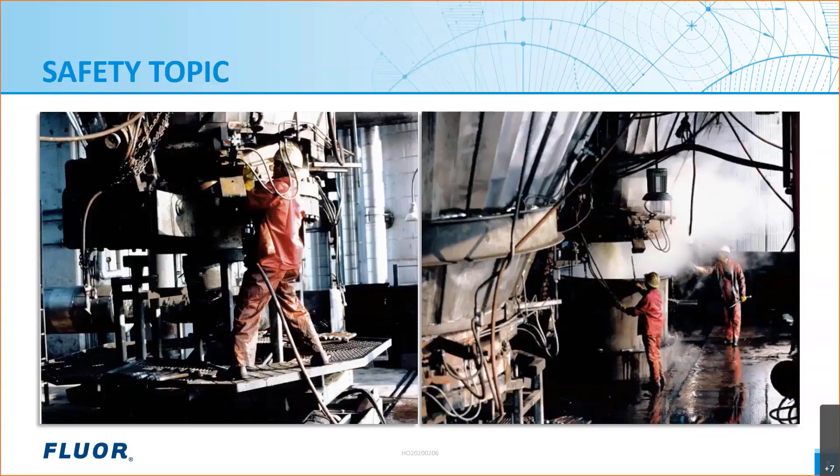The point of sharing this evolution and design is that safety and design can come from many sources: designers, operations, management, maintenance. It can be from the refiners, contractors, vendors, licensors. It just takes someone to say, what if? What if we do something to make this better and make it safer? Enhanced safety can originate from anyone willing to look at things differently and take initiative.

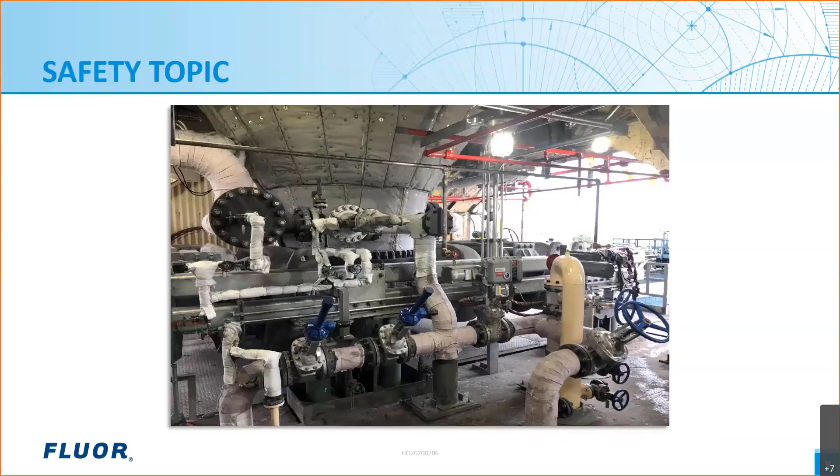Now I recognize that not all the participants in this webinar have a working knowledge of delayed coking. So I thought I would spend just a little bit of time, a few minutes, to introduce delayed coking with the hope that it will help as we present other ideas later in the presentation.

So delayed coking is a severe thermal cracking process which breaks very long chain hydrocarbon molecules, such as tar, into smaller molecules, such as off-gas propane, butane, naphtha, diesel, and gas oil. This is done by adding large amounts of energy via the coker furnace with effluent temperatures over 900 degrees Fahrenheit.

It converts essentially unusable, low-demand material into higher-demand, useful intermediates and products. The byproduct of this process is the production of petroleum coke, which is essentially 85% carbon with other impurities. Other byproducts of the reactions are the formation of ammonia and H2S.

So the cracked usable products leave the coke drum as vapor and are sent to the fractionator for further refinement. The coke remains in the coke drum and eventually has to be removed once the coke drum is filled with coke.

Note that the coke drums are located in a structure generally 50 to 100 feet above grade, and the coke drum size is dependent upon throughput, but sizes of 17-foot to 32-foot are common, and the overall height of a coke drum is about 120 feet.

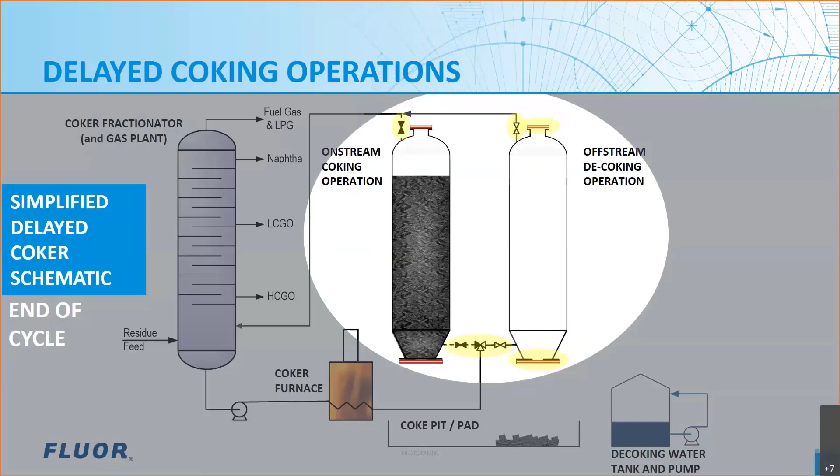So in the last 30 years, Fluor has performed 80 projects, both design and construction projects. They've been both grassroots and revamp projects.

We've done 9 grassroots DCUs over the last 30 years. We've done 44 drum replacements as revamp projects. Of note, Fluor has 14 coke drum deheading system and delayed coking patents, and we've been an innovative leader in the industry for quite a while.

With both the DCU patents and the innovation, I'd like to recognize just a few of the excellent mechanical engineers instrumental in forward thinking and innovation that I've worked with in the last 30 years. We have very good mechanical engineers.

Les Dalfi and Mike Knowles were both instrumental with respect to Fluor patents and innovation. Kenneth Kirkpatrick is an expert in finite element analysis, and I'll explain that in just a second. And in my office, I've worked directly with Mark Thies and Pat Lawley, my local office experts with regards to coke drums and unheading devices.

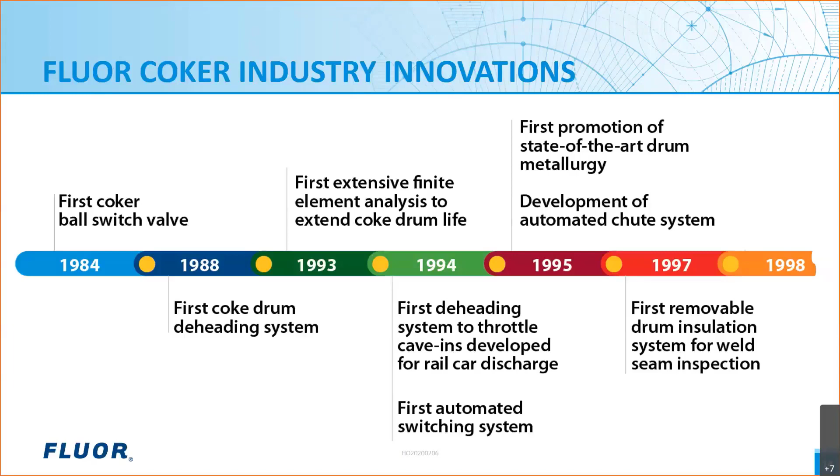As of 20 years ago, we put in the first totally automated top head deheading system. In 2001, we participated with DeltaValve in installing their first slide valve, and we've been doing that for 20 years with them now. More recently, we've developed a trolley support system for the Delta valves.

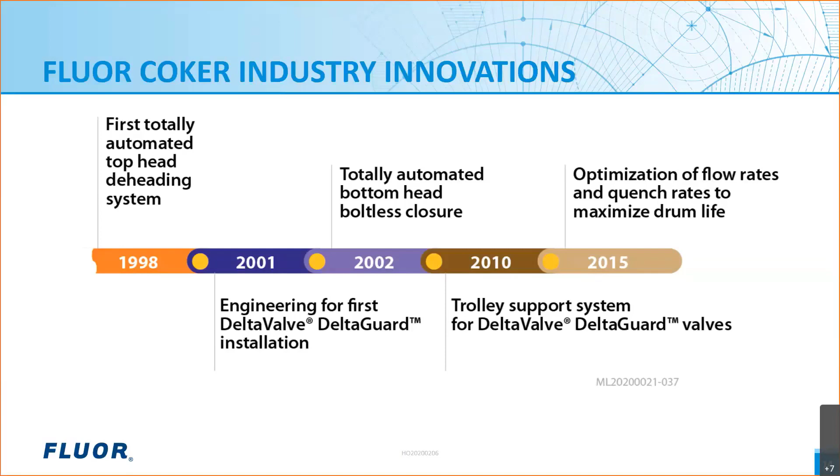We've looked at optimization of flow rates and quench rates to maximize drum life. All of that has to do with finite element analysis, which I'd like to explain now.

So what is finite element analysis? It's an intelligent, computerized method for forecasting how an engineering component will react to real-world forces like vibration and heat. It predicts whether a component will fail, collapse, wear out, or work the way it was designed.

Because coke drums are subjected to repeated thermal cycling at approximately 18 to 24-hour intervals, these vessels almost invariably develop bulges. With the proper inputs, FEA analysis can estimate how much deformation is acceptable before the vessel should be taken out of service or repaired.

Many of the old failures on old coke drums, such as buckled plates and cracked weld seams, have not appeared on newer coke drums due to this analysis, by matching plate yields, grinding inside and outside of weld seams, and having a constant thickness of drum plate material.

Fluor has done many of these analyses on coke drums, and Kenneth is our expert in running these analyses, having authored many papers on this specific topic. So, a very interesting series of events that have happened over 30 years in delayed coking.

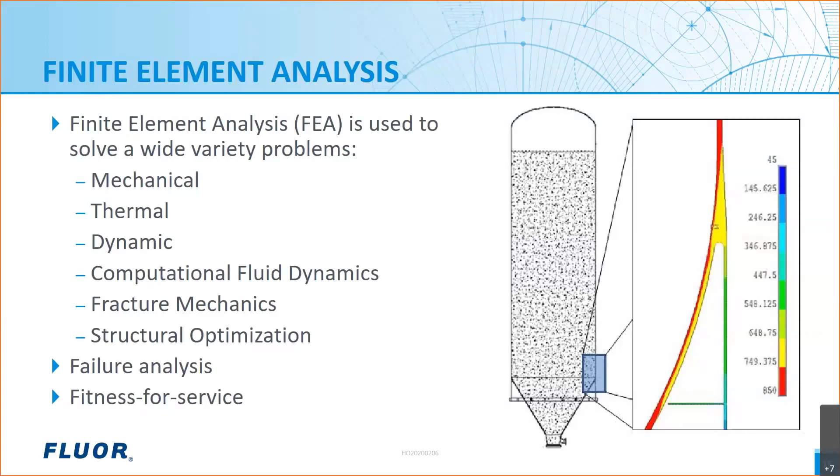In the next few slides, I want to talk about some of the challenges, some project highlights, and then give you a brief overview of some of the equipment and deheading devices we install on the revamp project. Some of the challenges faced in a coker replacement project include evaluation of the existing structure.

All of these revamp projects are done in an existing structure. Those structures are older, so they pose a lot of challenges, whether that's an alteration or repair, and also the addition of new equipment or steel, so we have to verify loads on the existing structure. And of course, we're trying to provide a very good design that meets our client's requirements and a low-cost option as well.

Some other challenges are local building codes and local municipalities, whether that's on the west coast or a location that has a high seismic zone. We have to work hand in hand with the building department to meet all local regulations and codes, and sometimes those pose challenges in determining exactly what additions will be needed to handle the new loads.

We also have short turnaround time constraints. These projects are done in existing units that are in operation, so we have to work around that time frame and toward a turnaround or outage when the client shuts down the unit so we can finish the project. There are limitations in the amount of piping, line sizes, where we can run things, pressure limits, and so on. Then there's logistics - I'll run through some pictures showing us transporting drums to a job site.

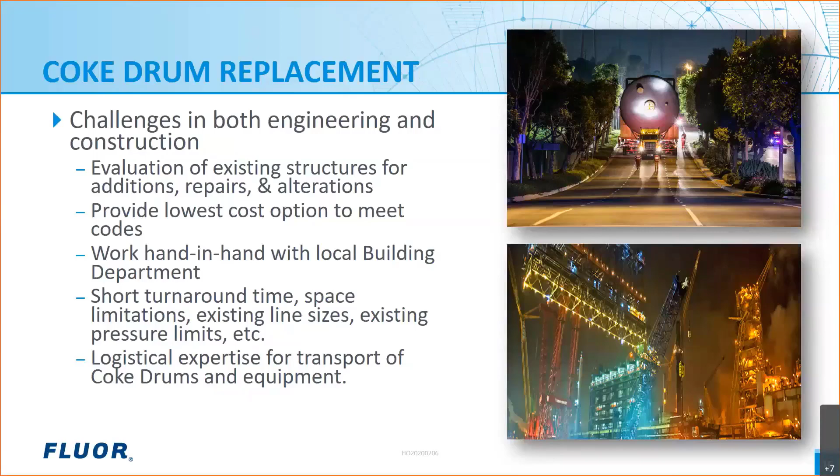So I'd like to talk about a coke drum reliability project and some of the highlights. In the next few slides, you'll see some pictures that I'll narrate too. Some of the highlights of this project: it's a 6-drum coker.

You can see the picture there on the left. It incorporated seismic upgrades to the structure. And then we had to develop quite an extensive lifting plan, because the top drilling section, or drilling derrick, of that structure was completely removed in one piece, set on the ground, and then the old drums were removed and new drums placed, and the derrick structure put back on top of it, all during a turnaround. This project was in 2014.

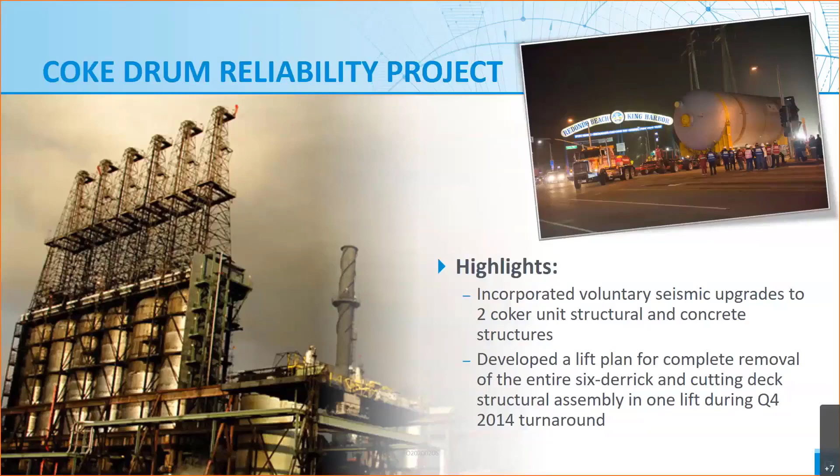As you can see, that is the existing structure. That structure was built in the 1960s, and as I stated, there were significant upgrades to the structural portions of the unit itself.

The next pictures are the coke drums. Those are 2 of the 6 drums being transported. The drums were originally produced in Spain and then transported to the West Coast, and then they were transported via barge to a smaller harbor that allowed us to take them off the barge via SPMTs and travel to the actual job site.

Some of the challenges I briefly touched on: moving the equipment to the job site. You've got to think of this as its own project, with all of its own nuances. Usually we are traveling on public roadways, so there is a lot of logistical expertise involved, working with local law enforcement and local municipalities to find the simplest but safest route to the project. You can see the drums there on the semi-truck being moved to the project site.

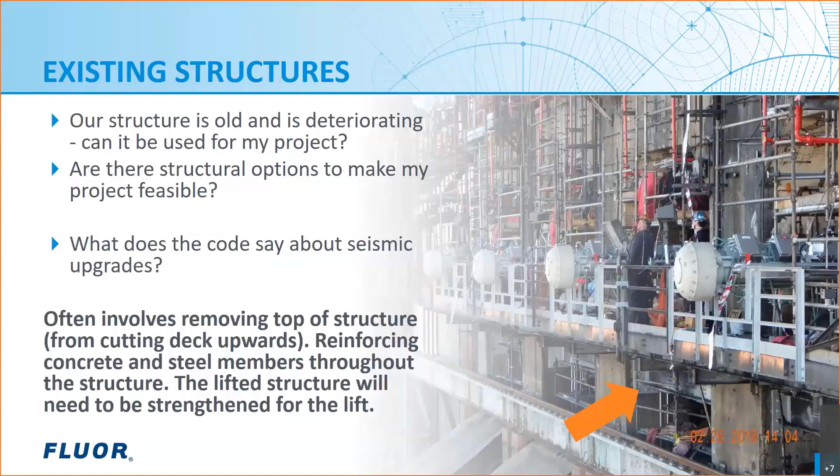And then, like I stated, lifting the structure - anything that gets lifted will need to be strengthened to support itself during the lift. Lifting itself: I like to break everything down in construction into smaller pieces and smaller projects. These are all large items, usually critical lifts due to their weight or due to the fact that you could be lifting over another structure or object. All of the structures pose a lifting challenge.

As you saw in the previous pictures, the coke drums or coker structures are vertical units. They do not have a landing deck or something where it's simple to sit equipment on. You can see in the picture there that's a delta valve on the hook of a 500-ton crane.

The delta valve itself weighs 78,000 pounds, and you can see that it's off-centered. The center of gravity on the delta valve, or any of the devices we install, usually isn't in the center of the item. So setting up the rigging and the lift plan is very crucial, not only to do it safely, but to make it completely successful and to understand how we're transferring the load from the crane to the structure itself.

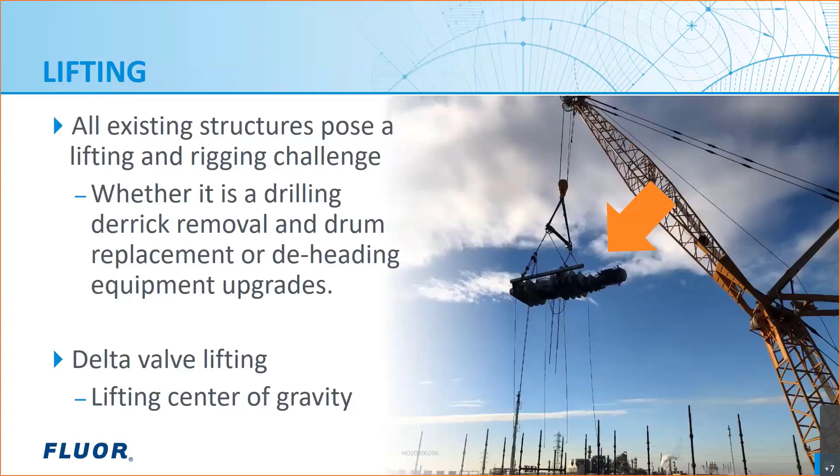Some of the other challenges posed in revamps are clearances and the overall space limitations in older or existing structures. You have to remember the structures were not designed to hold or house some of the new equipment that makes the deheading operation safe.

As you can see in the upper left picture, the arrows point to a small gap of light between a delta valve and the bottom flange of the coke drum. In that instance, a lot of engineering and time went into it with the team making measurements—check twice, cut once—and that gap was 1 inch between the top of the valve and the bottom of the coke drum. The bottom picture gives a better view, but as I stated, on the old drums or structures, space is very limited and everything has to be precise with the engineering and construction.

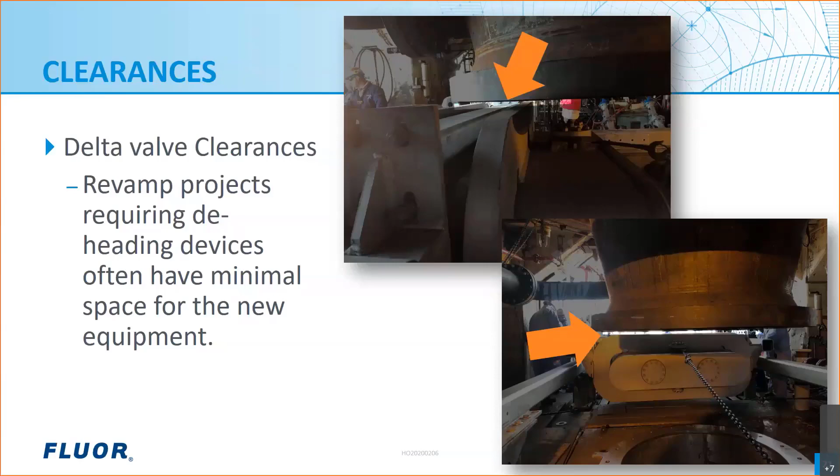So just to talk about some of the devices we install in coke drums and coker units: the left picture is a bottom unheading device and a center feed device coupled to the bottom cone of a coke drum, just to give an overview of how it goes together. The line feeding the center feed device, the shiny piece of pipe, is the feed line going in. The center picture is the center feed device, and it has two large holes in the insert, and that's how the product gets fed into the drum, dispersed evenly.

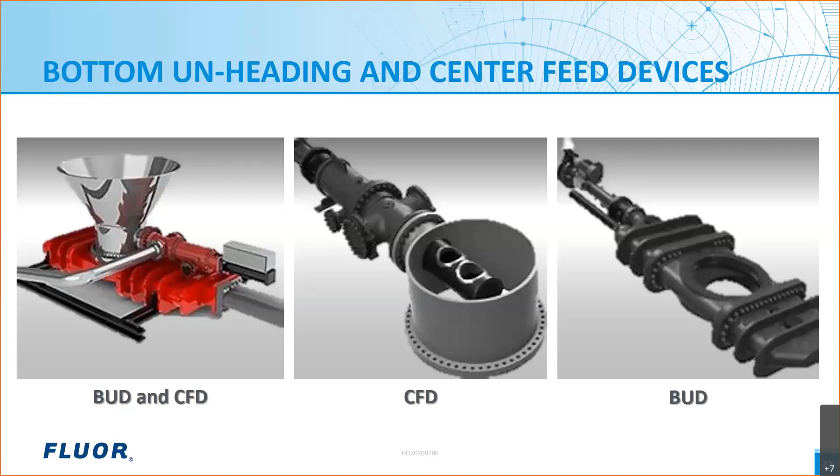On the right is a bottom unheading device. You can think of it as a very large gate valve, and that is what seals the bottom of the coke drum to the chute, which then drops into the containment area for the coke, and that eliminates operations or personnel from harm's way in the deheading of a coke drum.

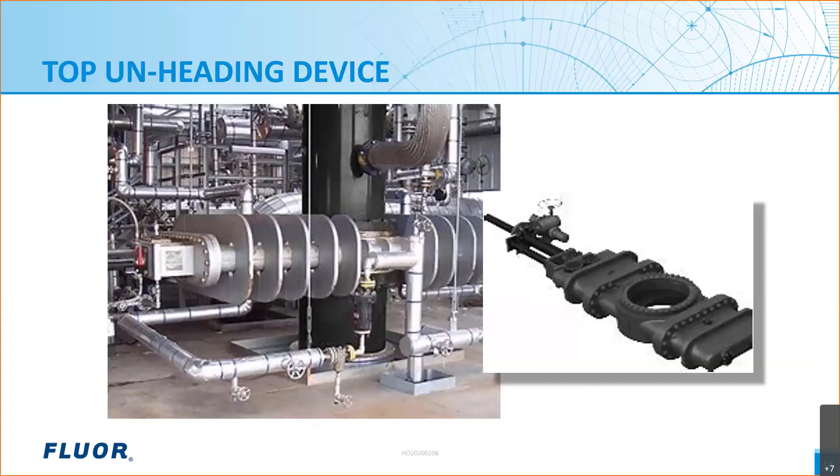The next one here is a picture of a top unheading device. As Grant talked about, the drums get filled and then cut using hydraulic methods. The top unheading device is very similar to the bottom unheading device, just different in size—still a very large gate valve. You can see the piping going above and below the valve is connected to the top of the coke drum. This fully encapsulates the drilling system and drill stem, and alleviates at the top of the drum any steam, product, or gases coming out. It removes the operational staff from harm's way by encapsulating it and making the process automated as well.

I'd like to go through some highlights on a couple of projects we've completed in the past few years. This project, shown directly from the site, was a 2-drum coker unit.

Some of the highlights we put in: new electrical control systems, 2 new control panels which operated the delta valves and the deheading equipment completely remotely without having any operational people in harm's way. We also added a new SIS system.

We had to do extensive modifications to the structural steel just to support the new equipment, and we had to provide new egress. As I stated, space is very limited on existing cokers because they're not designed to hold this new safety equipment. So in adding this equipment, we always have to look at providing new egress and safe paths for any personnel on the structure.

That was one of the big challenges on this project too—adding the decking and egress for the operational staff. Different cokers have different ways of moving product after it's cut and removed from the drum. This particular project had a coke pit with 2 large gantry cranes that move back and forth. Since the equipment is large, it did protrude from the structure, so to make things safe, we had to add new stops and modifications to the gantry crane to ensure it did not contact any of our modifications, whether the egress decking or the gearbox for the delta valve.

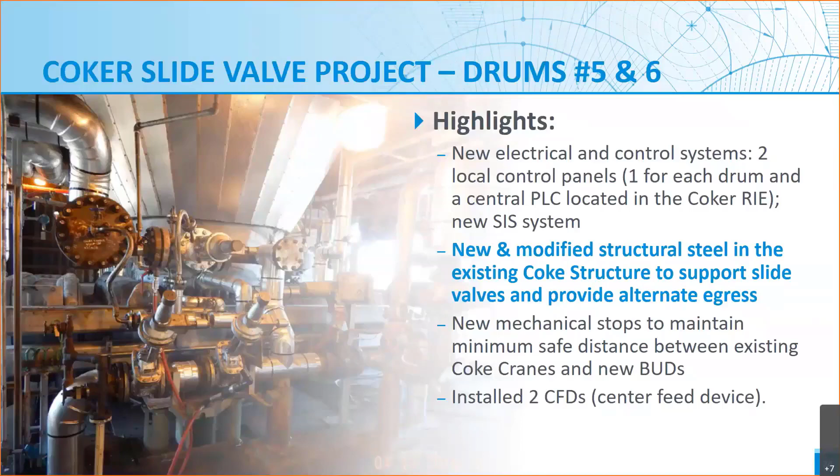To give more insight on the SIS system, it's a very robust system with a lot of interlocks and safety built in, making it so there's a set way to dehead, dump, and remove product or add product to the drum. Testing of the system is very intense, to say the least. It's a multiple day operation, going step by step through every scenario possible, making the deheading and coke removal and filling portion extremely safe.

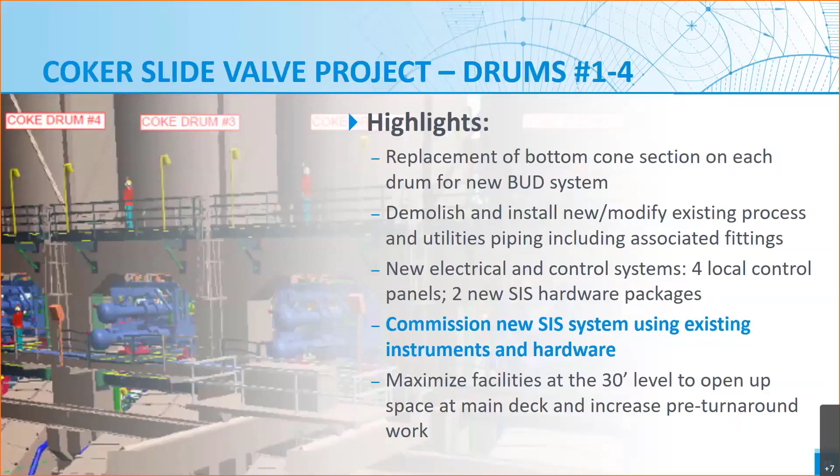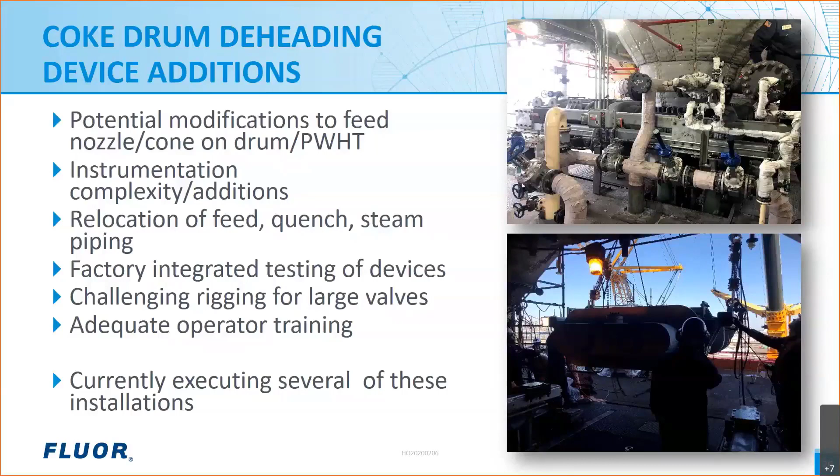So just going full circle, we started with the safety moment and showed some of the innovations that enhance safety in a delayed coker. The justification for a lot of these projects is often based upon improving uptime, reliability, or just end of life of equipment. But equally important is the fact that this is the most dangerous area of the plant.

Anytime you open up any equipment on a daily basis, it's complicated and dangerous. All of these upgrades we've talked about and been involved in remove workers from harm's way. There's been a lot of injuries and deaths over the years specifically because of coke deheading mishaps. It's probably one of the highest at-risk activities in a refinery.

So protecting people is absolutely key, and it's more and more becoming an industry requirement, not just to have a deheading device, but also to have the associated SIS systems that Kevin talked about.

You know, coke drums wear out. Many operating coke drums are nearing their end of life. It's not realistic that any refiner is going to be able to replace a coke drum without incorporating all of these new safety features, meaning putting in these slide valves and upgrading their SIS systems.